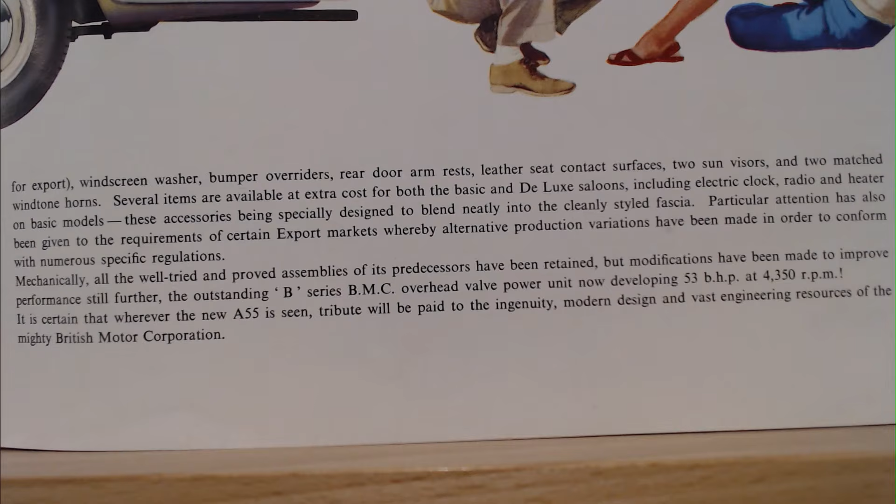Apologies, it is quite small writing, quite hard to see, but let's move to the car now.

So just zooming in on the front end there. Front end I always really liked. I always loved this sort of chrome around the headlights and these big overriders on there. Overriders, so it must mean that this is the deluxe example.

Moving the camera back, we see all that bright work around the windows, which I also really loved as well, and of course quarter lights. Incidentally, my love for quarter lights came from the Morris Oxford actually, which my dad had.

Overall, I really like the styling. I love these huge wings, sorry, not wings, fins on the back there with those interesting lights, and this sort of interesting area here where we'll certainly see later on you can have an option for a two-tone, and that kind of incorporated that little design.

But we can see this is a single colour car in this example, and then here is the family doing some kind of hiking type pursuit, although the children's footwear don't look suitable for that, and certainly the mother's doesn't.

Anyway, let's turn the page. So like I said, this does open into like a brochure style, so if I open this up...

So yes, at the top here, the colours, or some of the colours, we can see going around the edge, and then we've got a little bit of text in the middle, and then the list of colours. Let's look at this first, and then we'll come around these different colours here.

So it starts by saying colour and beauty from every point of view, and then this small writing tells us to choose from the magnificent range of exterior and interior trim colours.

You can be sure of the hard wearing qualities of the gloss enamel finish on the Cambridge saloon. For every body shell undergoes 31 preparatory processes, including rust preventing, degreasing, etc., before the first coat of true colour is applied.

At slight extra cost, dual tone paint exteriors are available, together with interiors in vinyl treated fabric and leather or Duracore. These, together with the standard range of single colour finishes, are set out below. So let's have a look at the table.

Going to the box gives you an idea of the colours you could choose: starting with the single tone colours of Farina Grey, Grampian Grey, Sutherland Green, Ocean Blue, Orchid or Black, and then the dual tone colours of Farina Grey and Horizon Blue, Farina Grey and Tartan Red, Farina Grey and Black, Farina Grey and Orchid, Orchid and Black. Then it starts talking about the different seats, whether you get leather, vinyl or treated fabric, etc. But the images are interesting and really show you a lot better.

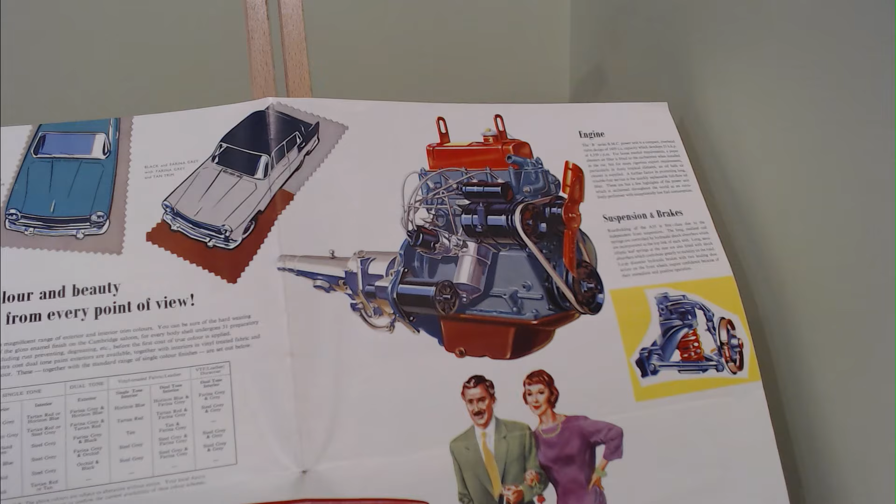Anyway, let's move back a little bit, because on the top right hand corner it starts talking about some of the mechanicals, and we certainly can't miss that. Let's go to the text for the engine first.

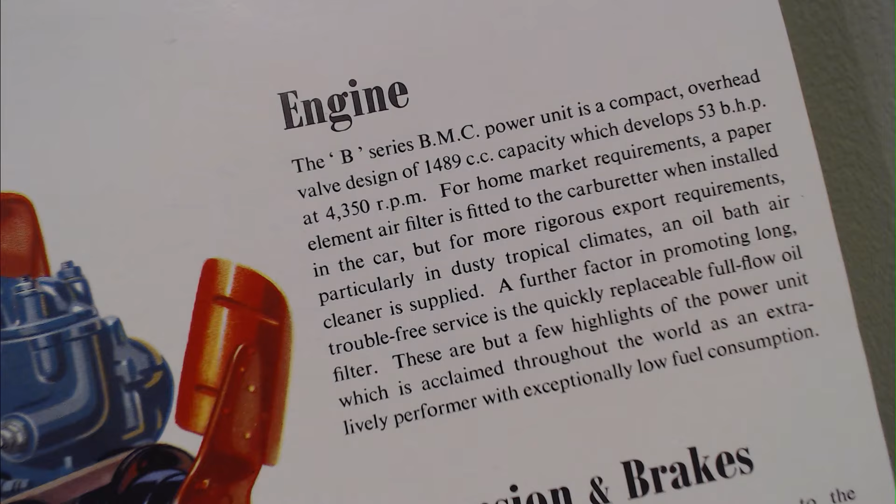Right at the top here it's telling us the B series BMC power unit is a compact overhead valve design of 1489cc capacity, which develops 53 bhp at 4,350 rpm. For home market requirements, a paper element air filter is fitted to the carburetor when installed in the car. But for more rigorous export requirements, particularly in dusty tropical climates, an oil bath air cleaner is supplied. A further factor in promoting long, trouble-free service is the quickly replaceable full flow oil filter. These are but a few highlights of the power unit, which is acclaimed throughout the world as an extra lively performer with exceptional low fuel consumption.

And then we got a really beautifully drawn image of the engine. That's quite talented to draw that particular engine, and certainly a shout out to the artists of the time who are never named.

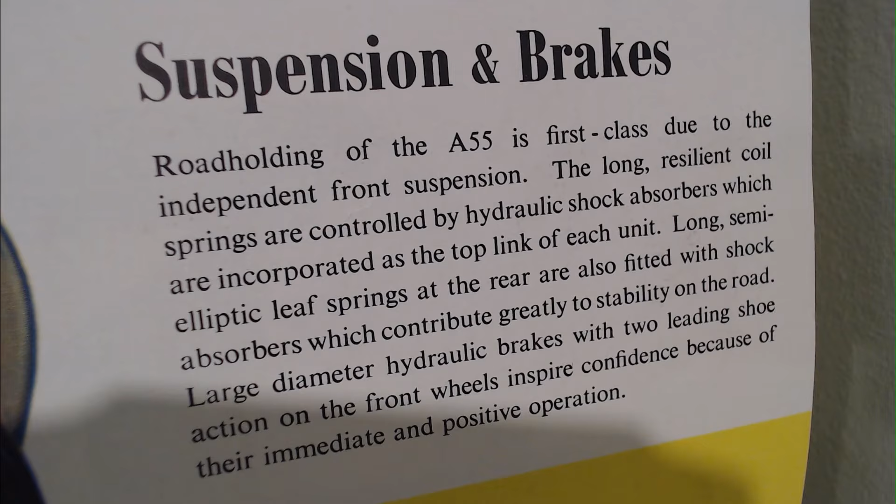Suspension and brakes: road holding of the A55 is first class due to the independent front suspension. The long, resilient coil springs are controlled by hydraulic shock absorbers, which are incorporated as the top link of each unit. Long semi-elliptic leaf springs at the rear are also fitted with shock absorbers, which contribute greatly to stability on the road. Large diameter hydraulic brakes with 2 leading shoe action on the front wheels inspire confidence because of their immediate and positive operation. And then to go with it, another really beautifully drawn image, this time of the suspension and brakes.

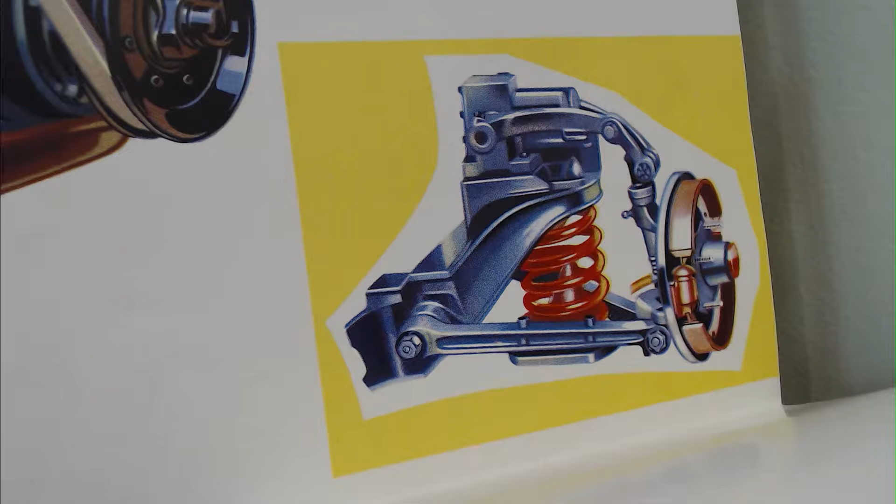Working our way down to the bottom of the brochure now, it starts talking about some of the key features: door handle, ashtray, pendant pedals and fascia. So let's work our way around here. Firstly, door handle: push button handles are fitted to all doors, and an additional safety catch in the lock mechanism ensures that little fingers are well out of mischief.

Once set in the safety position, the door locks can only be operated by the outside handle.

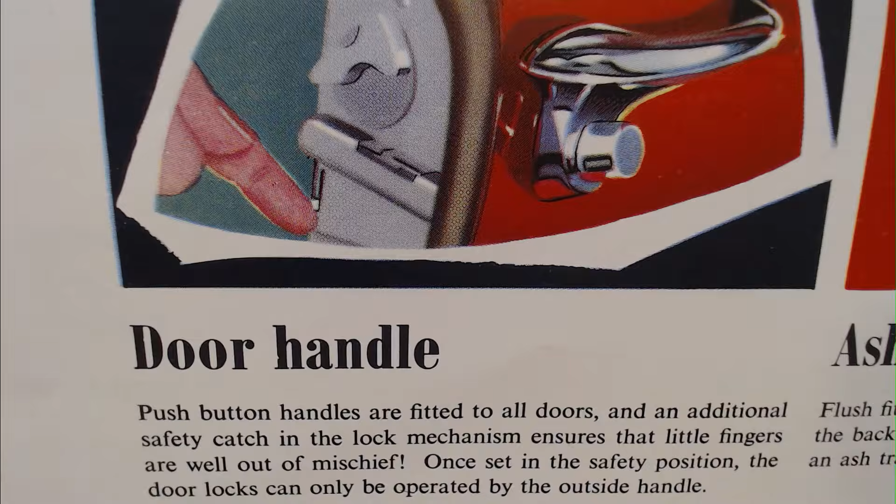Ashtray: flush fitting ashtrays are provided for rear passengers in the back of each front seat squab. For front seat occupants, an ashtray is included in the centre of the fascia top.

Pendant pedals for the hydraulic operation of clutch and brakes, together with the accelerator pedal, are conveniently positioned and ensure freedom from drafts.

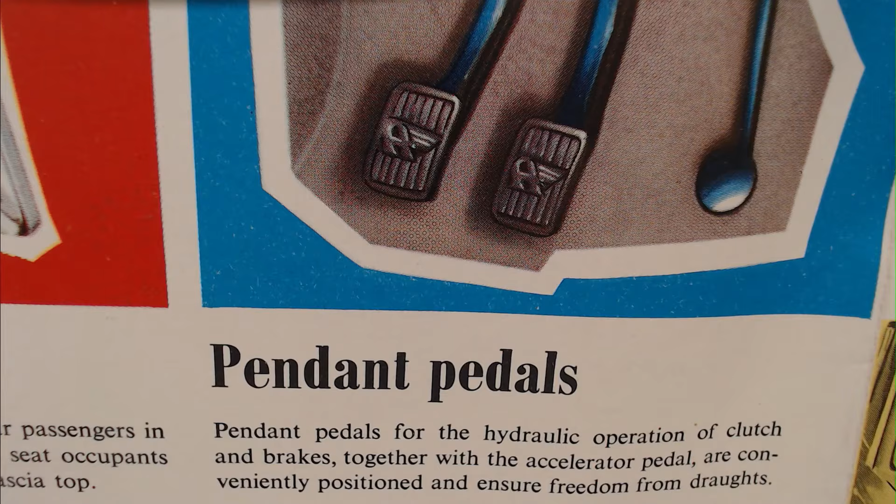Fascia: here again, up to the minute styling has produced an extremely pleasant fascia, carrying the control switches and instruments which tell you all that is needed when driving the Cambridge.

On the passenger side is the enclosed glove box, and beneath is a map or parcel shelf. The top of the fascia is trimmed in black vinyl treated fabric to reduce windscreen reflections, and a foam rubber roll runs along the length of the front edge.

Centre floor or steering column gear change can be fitted as required, providing a choice is made when ordering the car. So we can have column shift or floor shift on these. Let's just move a little bit further.

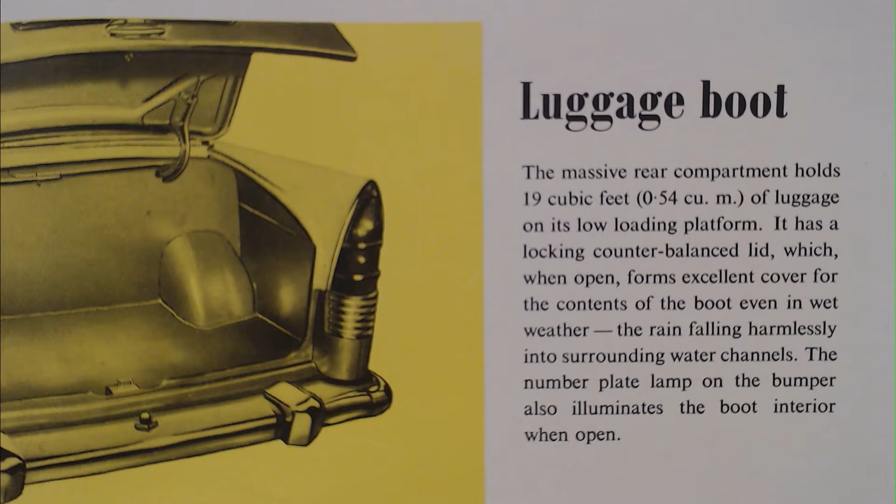The massive rear compartment holds 19 cubic feet of luggage on its low loading platform. It has a locking counterbalance lid which, when open, forms excellent cover for the contents of the boot even in wet weather, the rain falling harmlessly into surrounding water channels. The number plate lamp on the bumper also illuminates the boot interior when open.

Also gives you a little bit of a nice look at those fins.

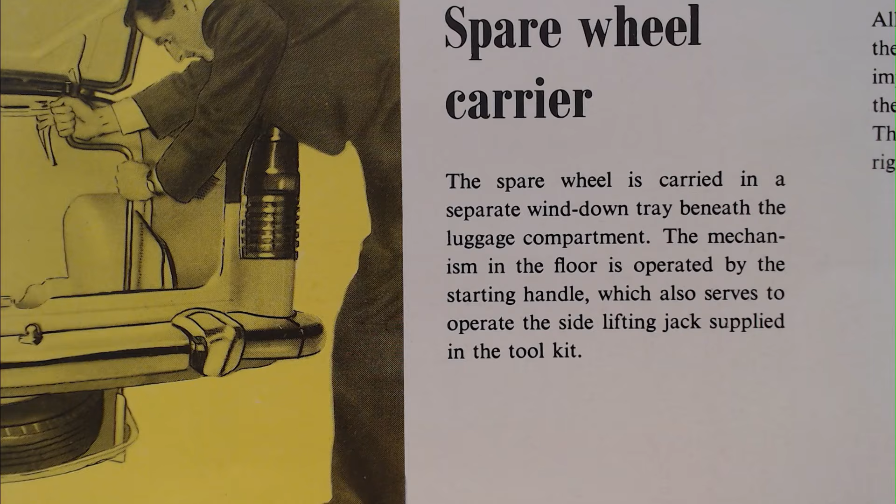Spare wheel carrier: the spare wheel is carried in a separate wind down tray beneath the luggage compartment. The mechanism in the floor is operated by the starting handle, which also serves to operate the side lifting jack supplied in the toolkit, and there it is, winding it down to reveal that spare wheel. Looks like it's in a protective cover, which is nice, so it protects it from some of the elements.

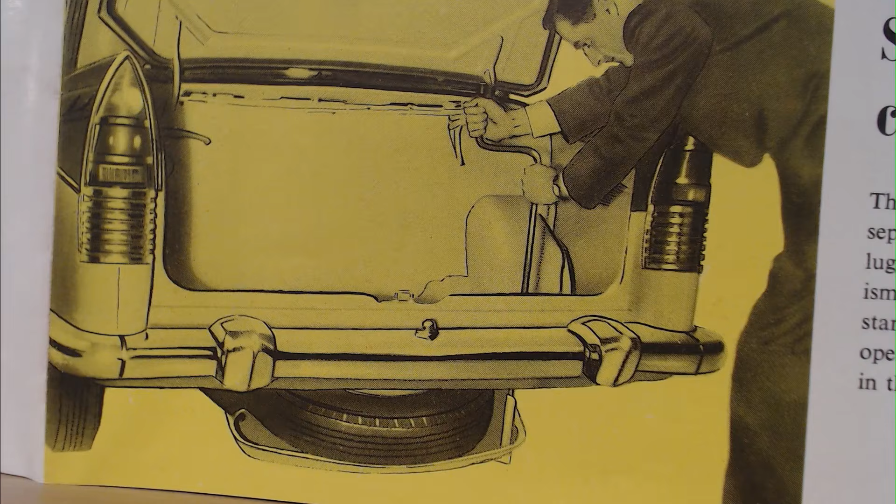And then the wide opening rear door. All doors open wide for free accessibility into the interior, and the locking mechanism of the front door is such that it is impossible to lock oneself out of the car when the key is left in the ignition switch. The combined rear stop lamps and direction indicators are right where they are needed at eye level to following traffic.

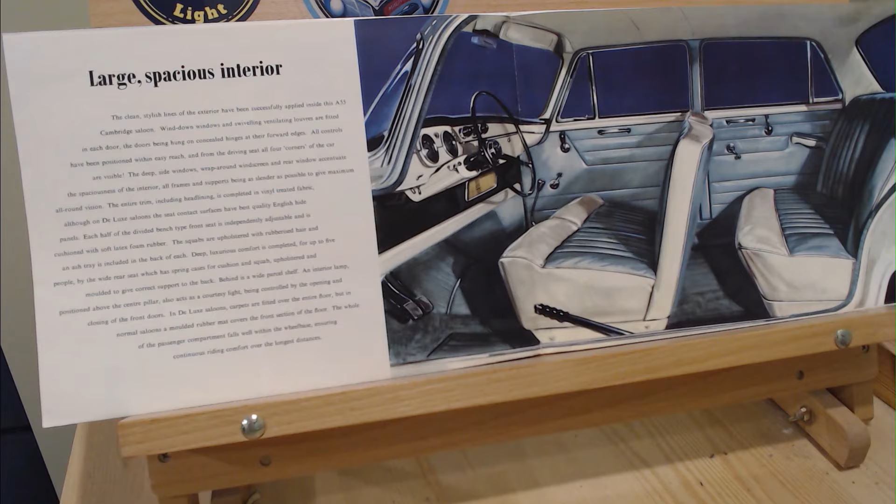And there it is. And we'll look at that nice fin and those lovely door cards. And there we go, we fold the brochure back, and then we get to that interior image, which is a lovely drawn image. Very talented whoever did that. We'll read the text first and we'll have a look at this.

Large, spacious interior, it tells us. The clean, stylish lines of the exterior have been successfully applied inside the A55 Cambridge saloon.

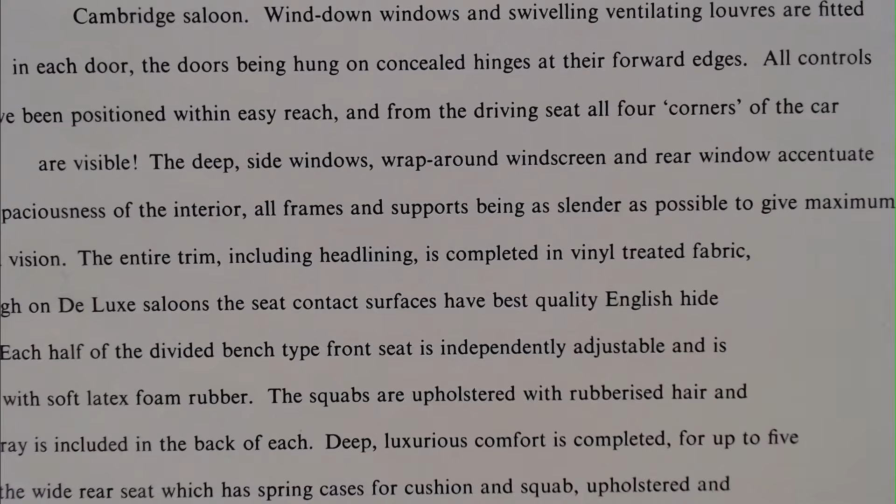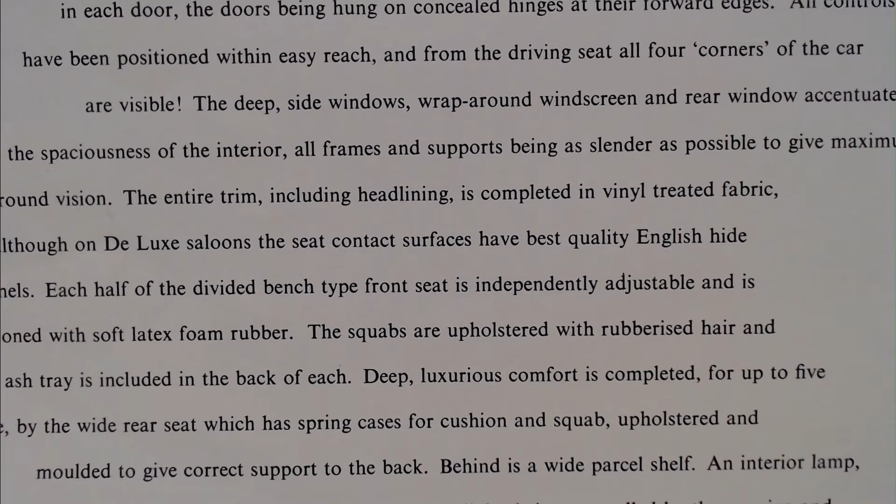Wind down windows and swivelling ventilating louvers are fitted in each door, the doors being hung on concealed hinges at their forward edges. All controls have been positioned within easy reach, and from the driver's seat all four corners of the car are visible. The deep side windows, wraparound windscreen and rear window accentuate the spaciousness of the interior, all frames and supports being as slender as possible to give maximum all-round vision.

The entire trim, including headlining, is completed in vinyl treated fabric, although on the De Luxe saloons the seat contact surfaces have best quality English hide panels. Each half of the divided bench type front seat is independently adjustable and is cushioned with soft latex foam rubber.

The squabs are upholstered with rubberized hair, and an ashtray is included in the back of each. Deep, luxurious comfort is completed for up to 5 people by the wide rear seat, which has spring cases for cushion and squab, upholstered and moulded to give correct support to the back. Behind is a wide parcel shelf.

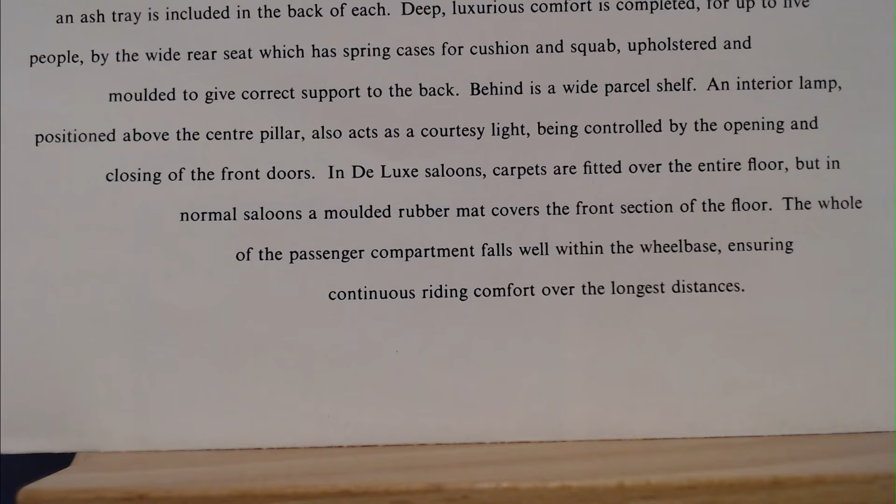An interior lamp positioned above the centre pillar also acts as a courtesy light, controlled by the opening and closing of the front doors. In De Luxe saloons, carpets are fitted over the entire floor, but in normal saloons a moulded rubber mat covers the front section of the floor. The whole of the passenger compartment falls well within the wheelbase, ensuring continuous riding comfort over the longest distance.

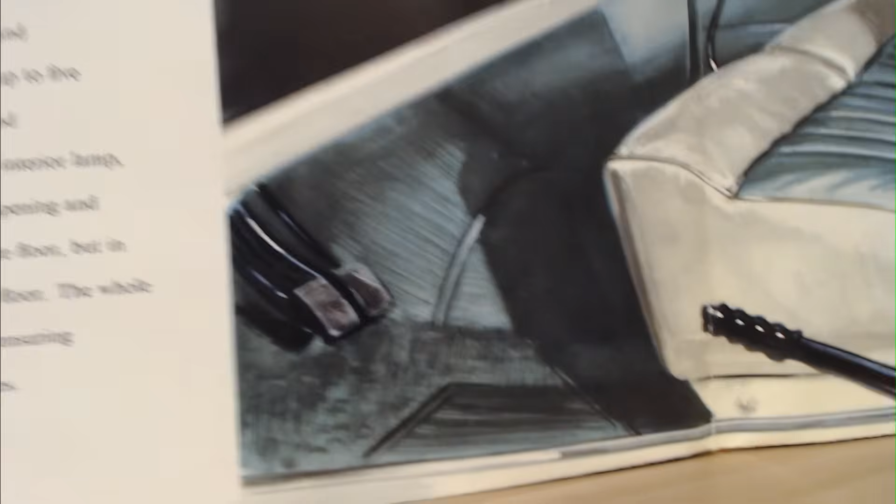And then if we go to the bottom here, looks like this is the drawing of the deluxe example. Of course, looks like more like carpet rather than just a rubberized mat. And then we fold the brochure all the way back again, and that gives us the specifications. As we know, the older the brochure, the more detailed the specifications. So we'll go through this and pick out the key points.

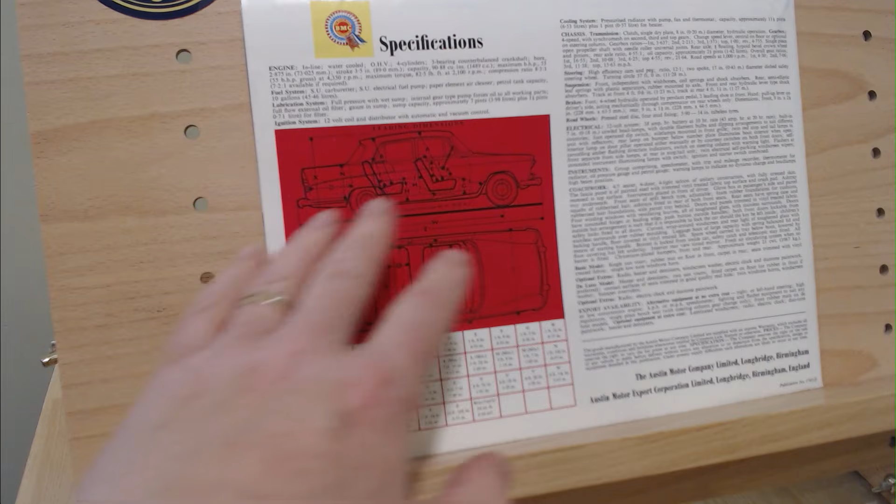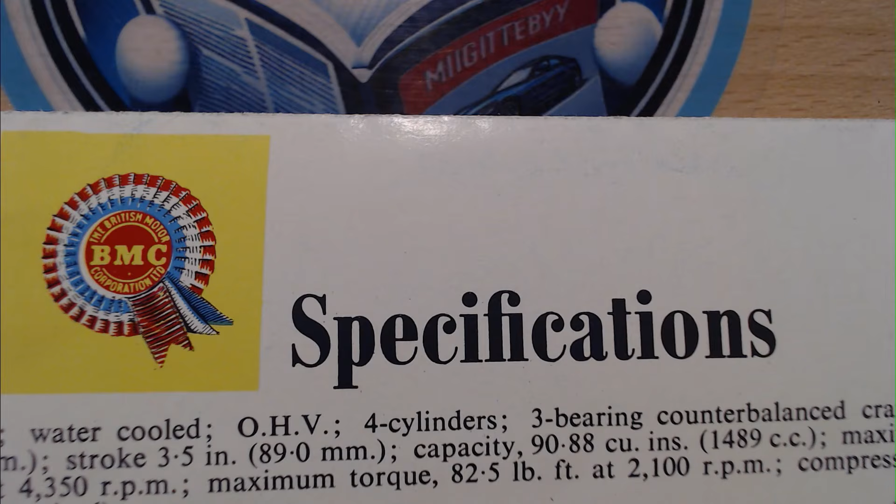This is all the dimensions. I'll probably just cast the camera over those, though it's a bit hard to show all the dimensions on camera. Of course, got to show that lovely little BMC ribbon on there. So tiny little writing again, I've had to zoom in a long way. Unfortunately, zooming in a long way means half of it's missing, but we'll work that out as we go.

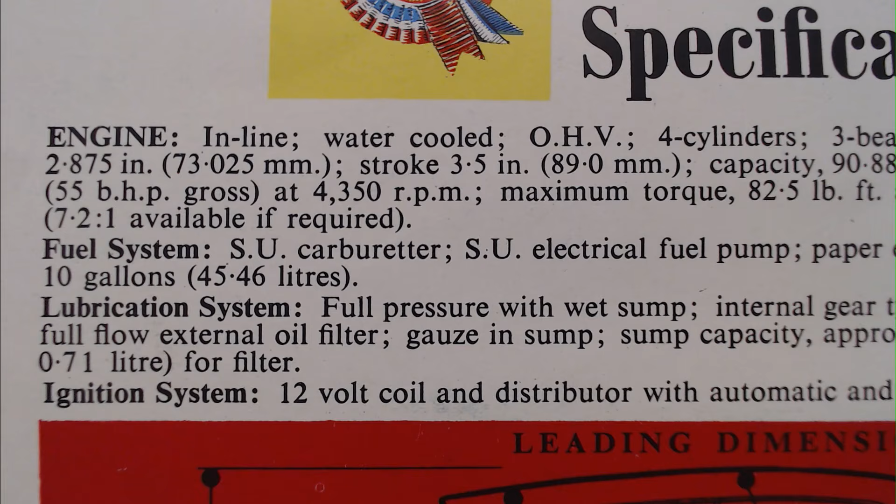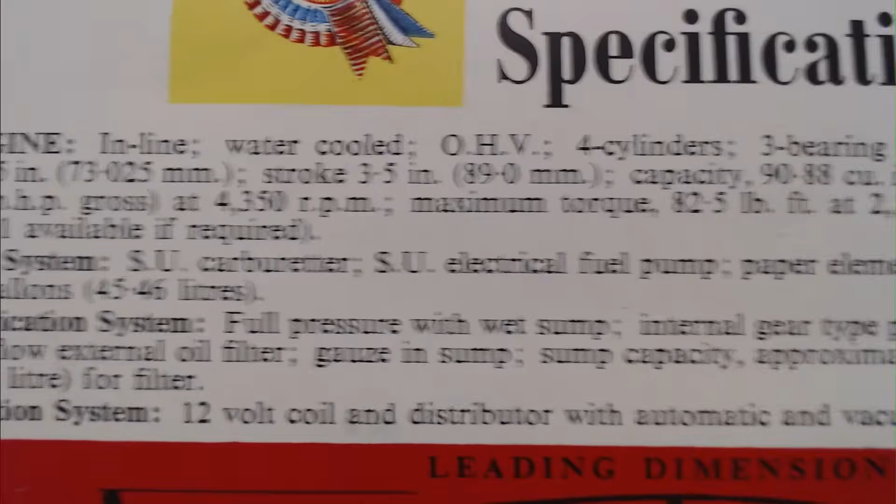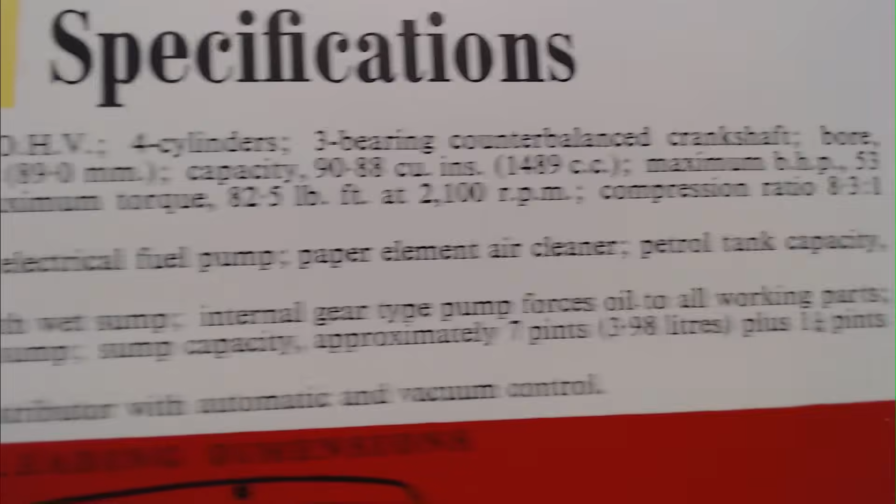Engine: inline water-cooled OHV 4-cylinder, 3-bearing counterbalanced crankshaft, bore, stroke and capacity 1489cc, maximum bhp 53, 55 bhp gross at 4350 rpm. It also shows the maximum torque and compression ratio.

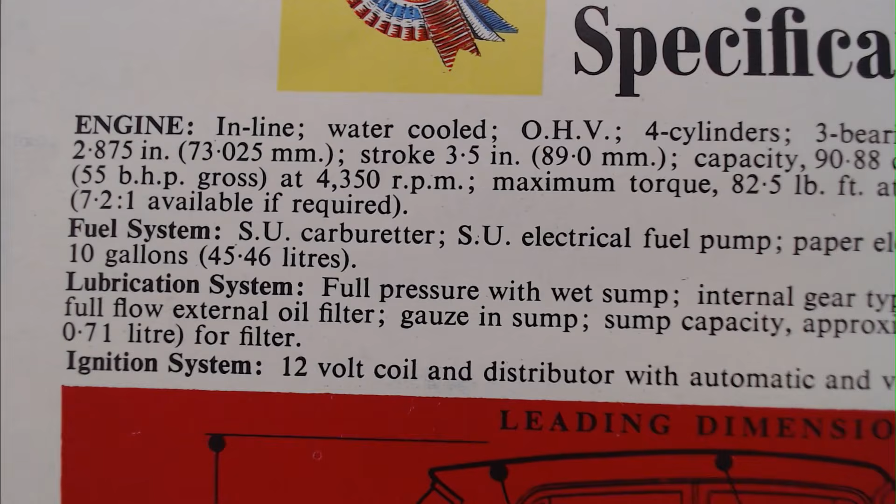Fuel system is SU carburetor, SU electric fuel pump, paper element air cleaner, petrol tank capacity is 10 gallons. Then the lubrication system: full pressure with wet sump, internal gear type pump forces oil to all working parts. Full flow external oil filter gauze in sump capacity approximately 7 pints plus 1¼ pint for the filter.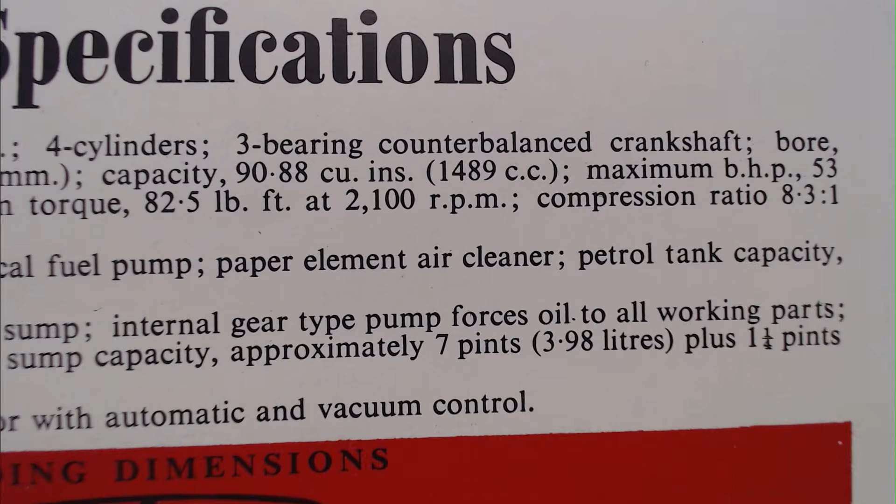Ignition system is 12 volt coil and distributor with automatic and vacuum control. And then of course there are sort of dimension images that they do, but like I say, really too small to show you in great detail on camera. Takes us to the cooling system: pressurized radiator with pump, fan and thermostat, capacity approximately 11½ pints plus 1 pint for the heater.

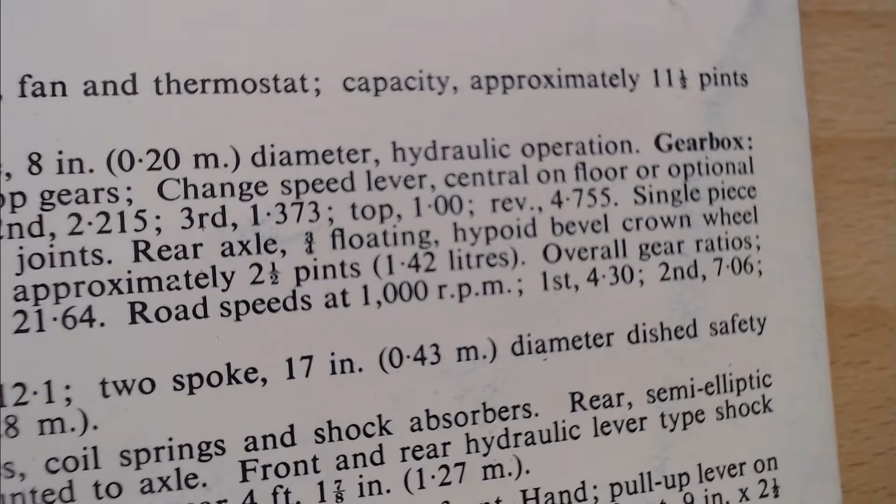Chassis, transmission: clutch single plate 8-inch diameter, hydraulic operation. Gearbox is a 4-speed with synchromesh on second, third and top, so no synchromesh on first. Not unusual for the time though, of course. Change speed lever, central on floor or optional on steering column, and then it goes through all the gear ratios.

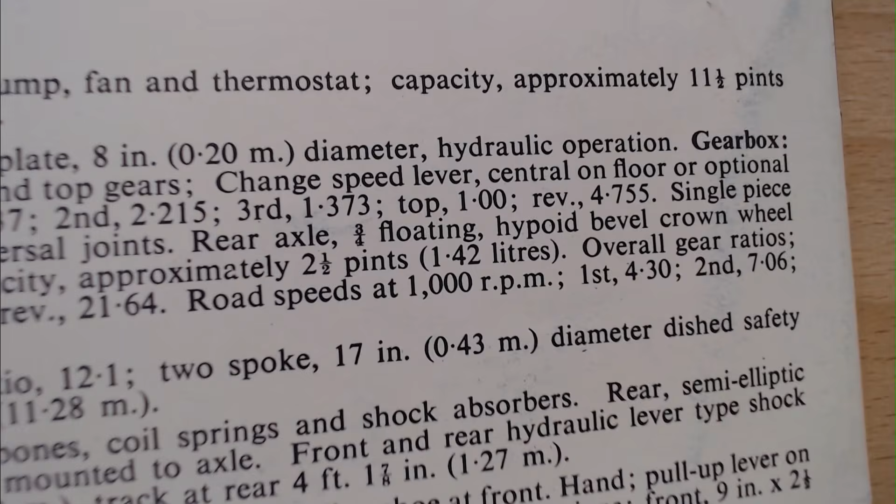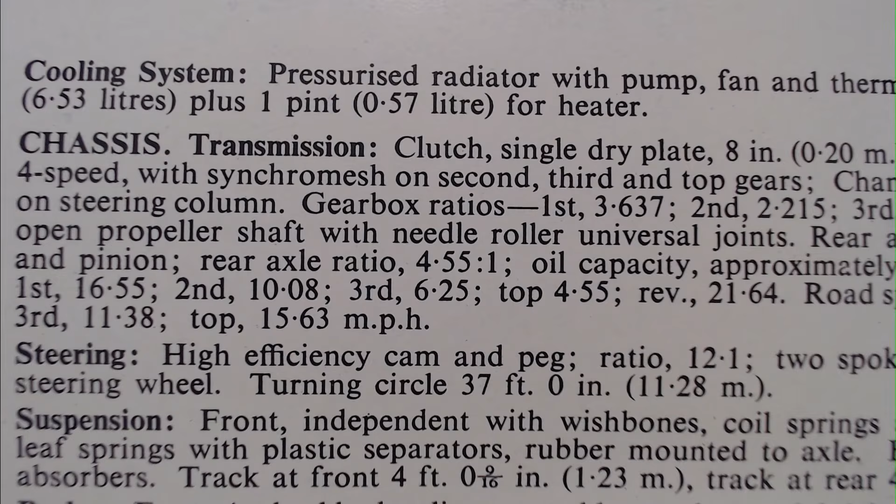And then it tells us single piece open propeller shaft with needle roller universal joints, rear axle with a 3/4 floating hypoid bevel crown wheel and pinion. Tells you about the rear axle ratio, oil capacity approximately 2½ pints, overall gear ratios, and then it tells you those overall gear ratios. But I do apologise for moving the camera around.

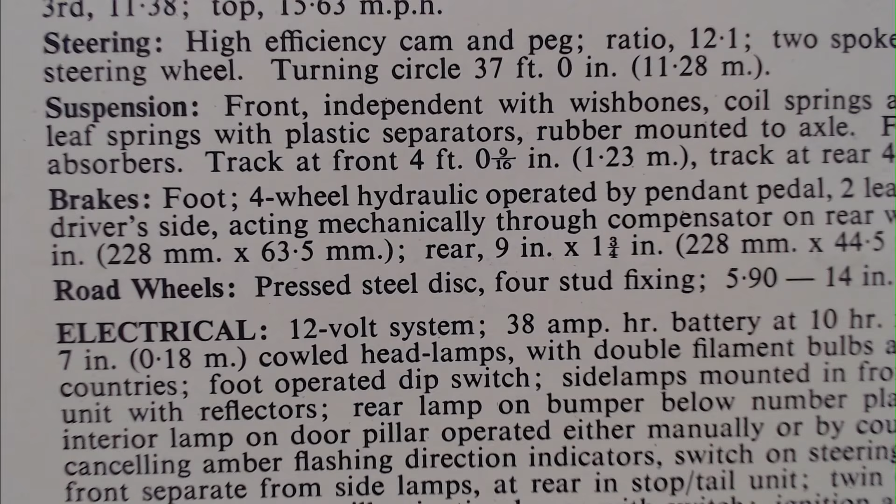Like I say, it's a hard one to really film, this one, and I want to give you as much detail as possible. That then takes us to the steering, which is a high efficiency cam and peg. Tells you the ratio for that. 2-spoke 17-inch diameter dished safety steering wheel. Also tells you the turning circle of 37 feet.

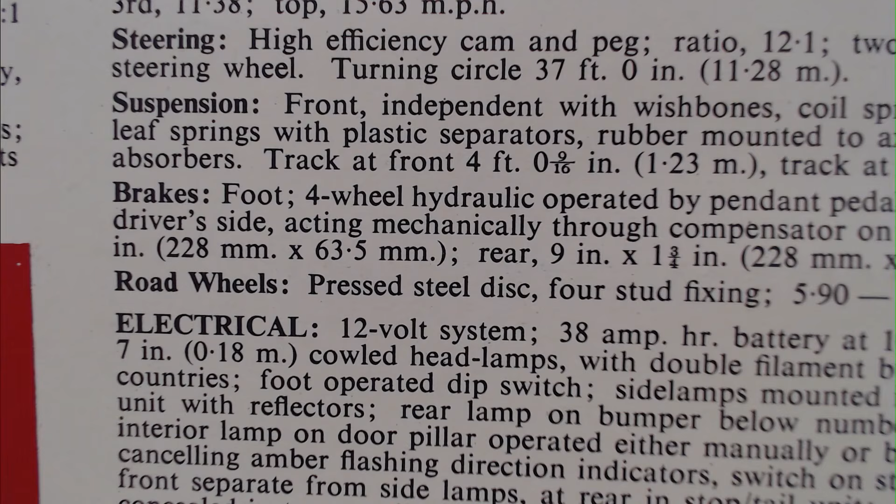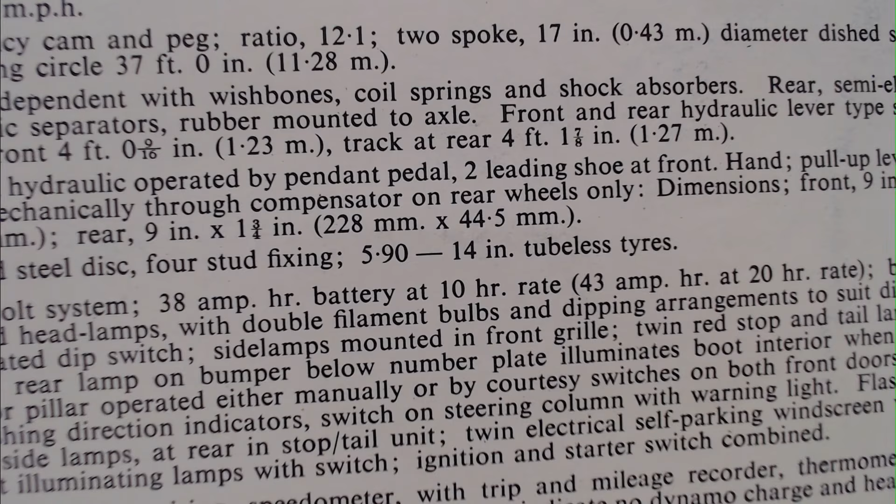Suspension front independent with wishbones, coil springs and shock absorbers. Rear semi-elliptic leaf springs with plastic separators, rubber mounted to axle. Front and rear hydraulic lever type shock absorbers. Track at front just over 4 feet. Track at rear 4 feet 1 and a bit, or 1.27 meters. Funny little details. Really, like I say, the older brochures go into crazy amounts of detail.

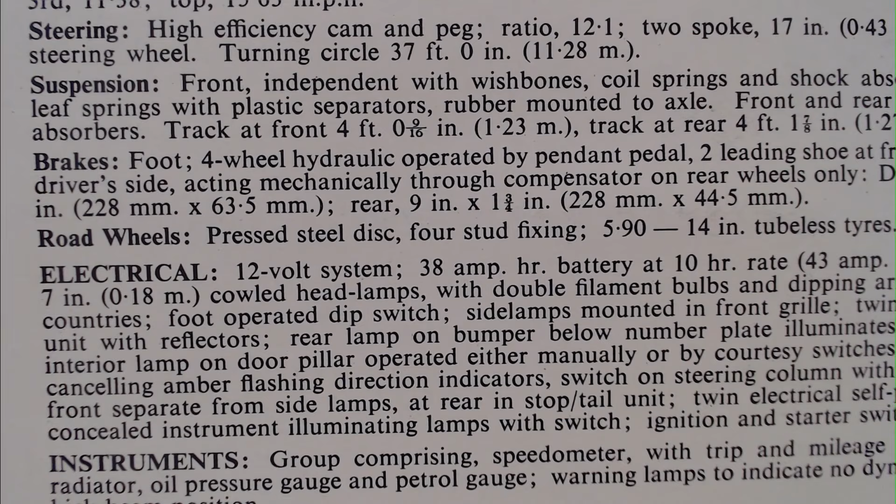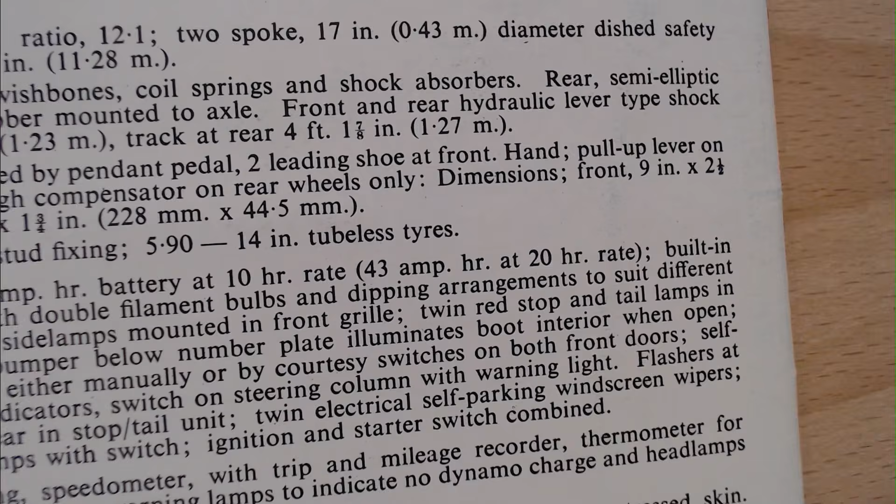Goes on to the brakes. Foot 4-wheel hydraulic operated by pendant pedal. 2 leading shoe at front. Hand pull up lever on driver's side, acting mechanically through compensator on rear wheel only. It shows the dimensions.

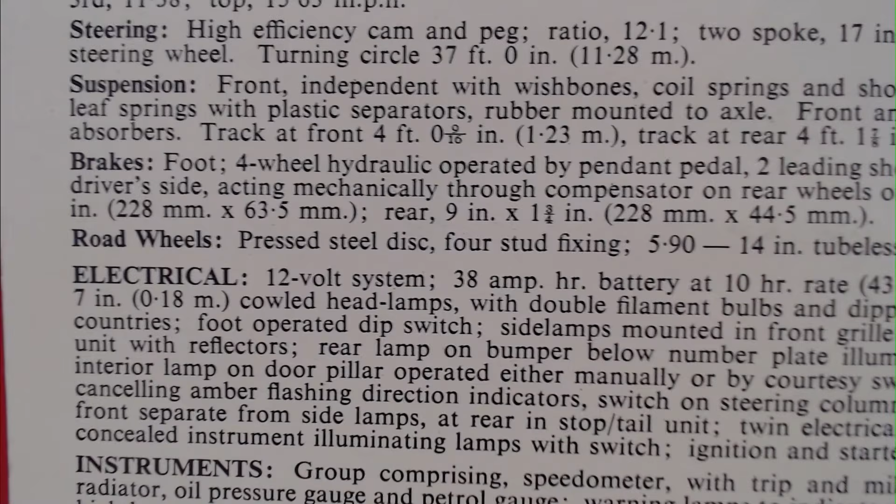Road wheels, pressed steel disc four stud fixing with tubeless tyres.

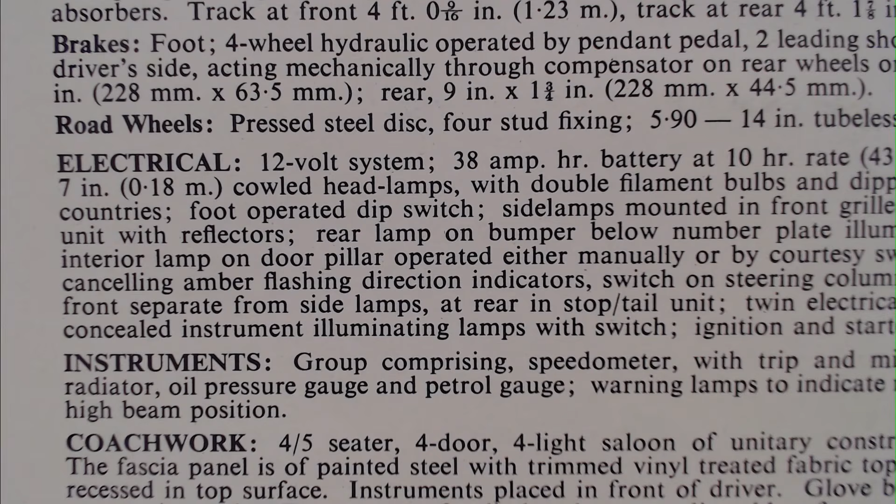Then it moves to the electrical. So it's a 12 volt system, as we learnt. 38 amp hour battery at 10 hour rate, or 43 amp hour at 20 hour rate.

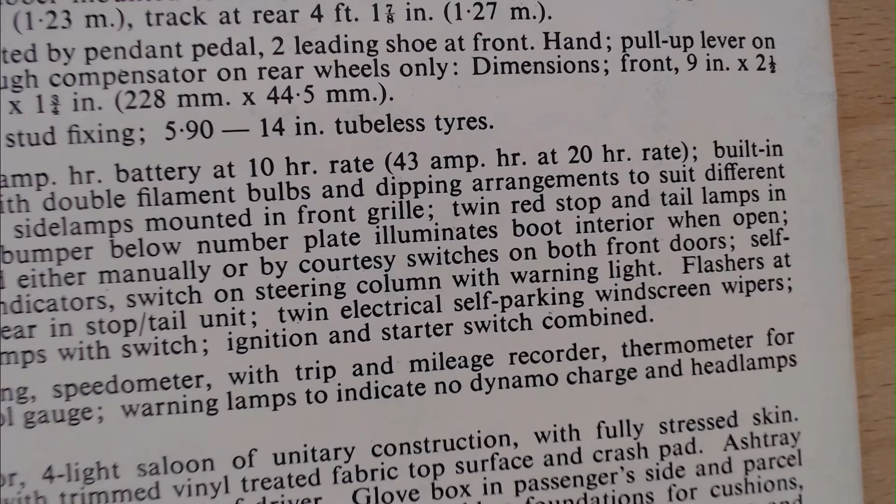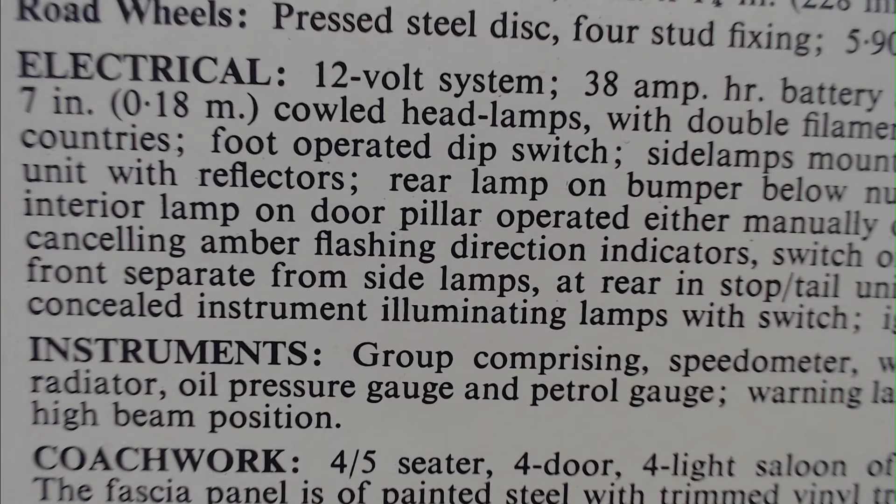Built-in 7-inch cowled headlamps with double filament bulbs and dipping arrangements to suit different countries. Foot operated dip switch, side lamps mounted in front grille, twin red stop and tail lamps in unit with reflectors. Rear lamp on bumper below number plate illuminates boot interior when open.

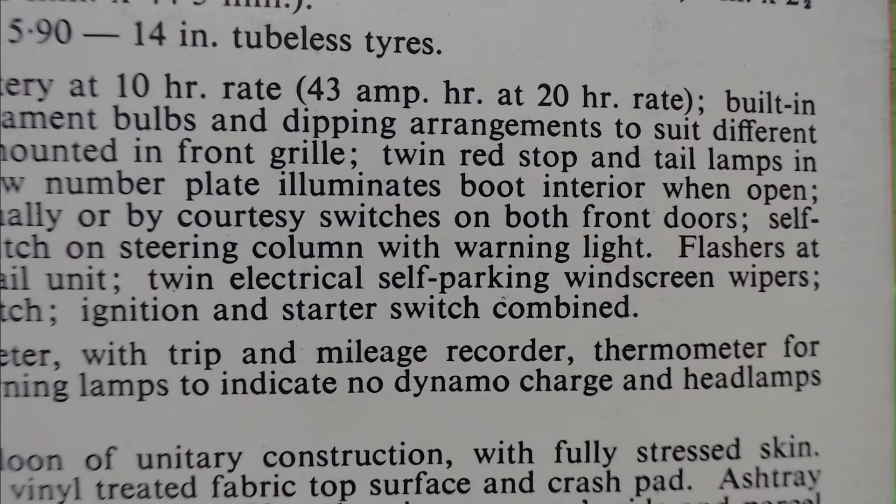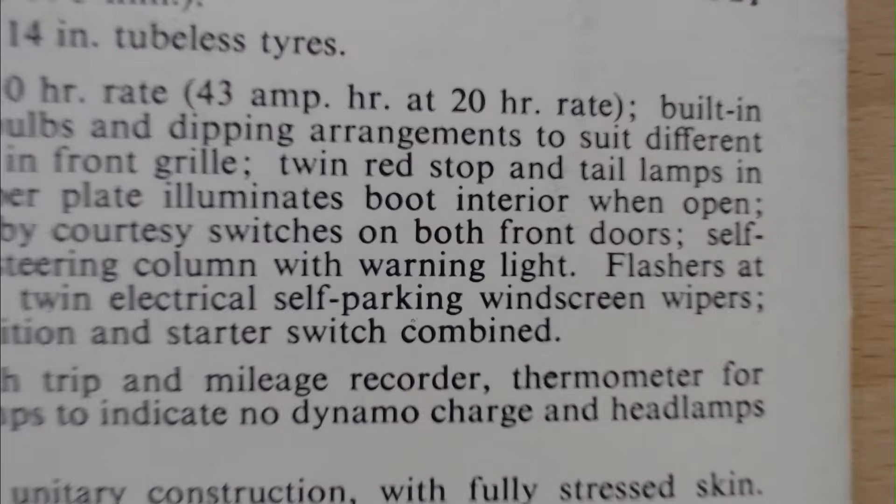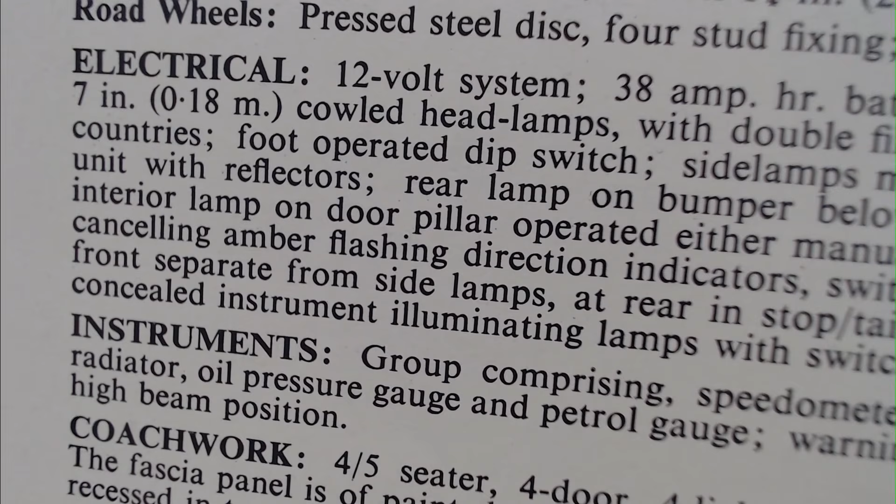Interior lamp on door pillar, operated either manually or by courtesy switches on both front doors. Self-cancelling amber flashing direction indicators switch on steering column with warning lights. Flashers at front separate from side lamps, and at rear in the stop tail unit. Twin electrical self-parking windscreen wipers. Concealed instrument illuminating lamps with switch, ignition and starter switch combined.

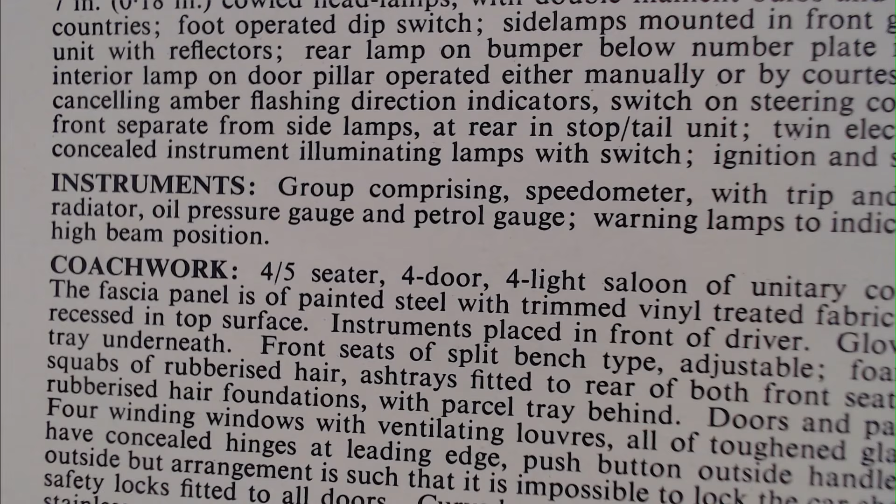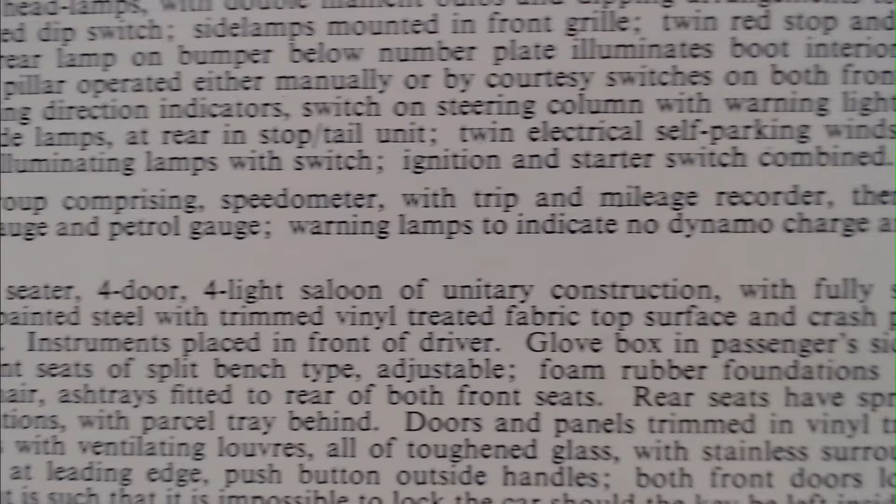So that moves us to the instruments. A group comprising a speedometer with trip and mileage recorder, thermometer for radiator, oil pressure gauge and petrol gauge, warning lamps to indicate no dynamo charge, and headlamps high beam position.

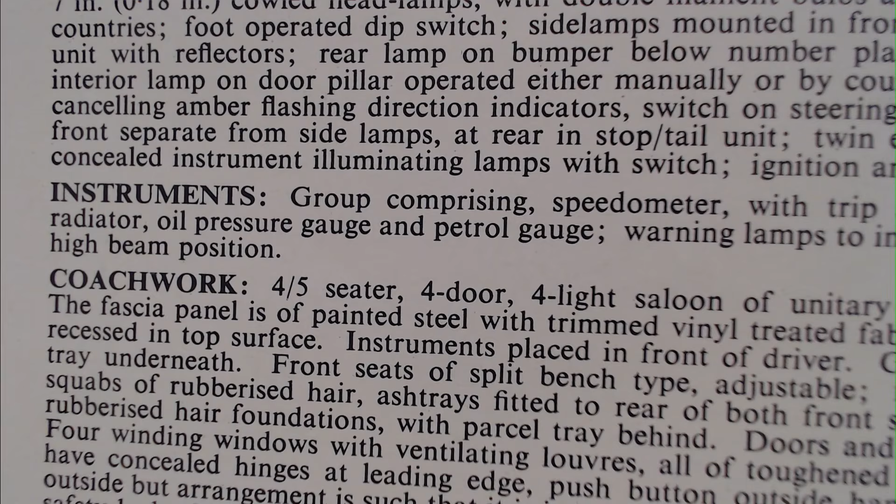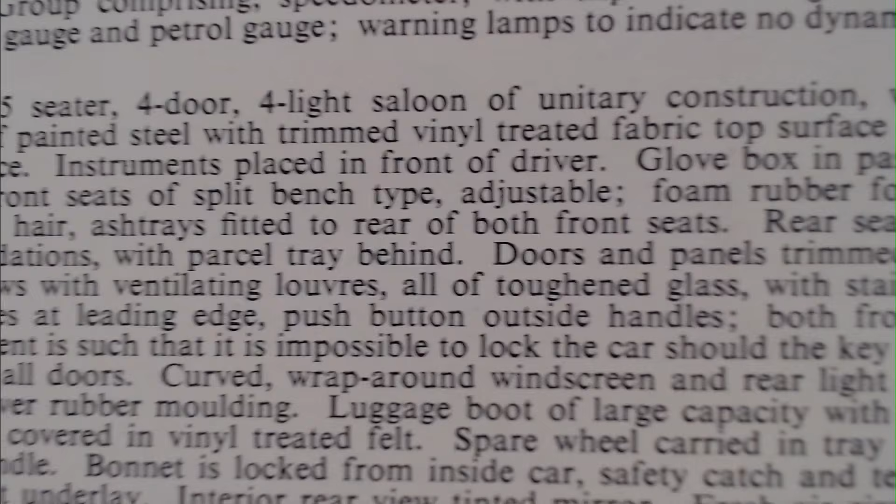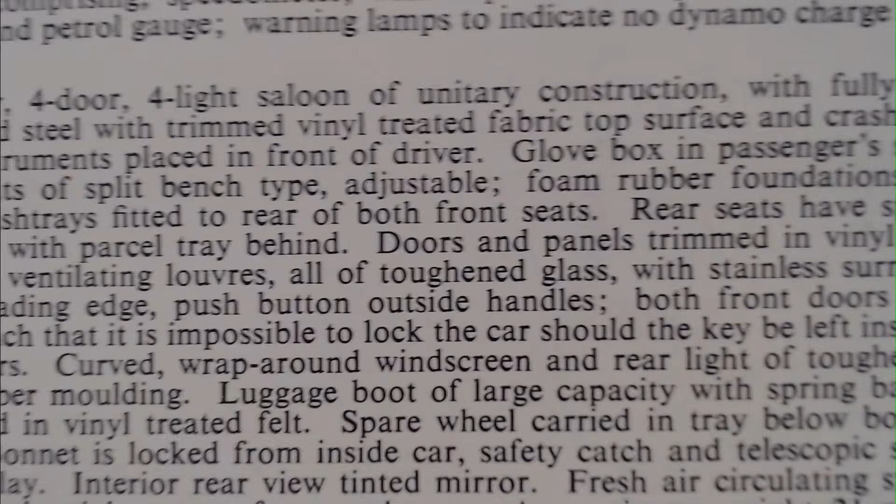And the coachwork: 4 or 5 seater, 4 door, 4 light saloon of unitary construction with fully stressed skin. The fascia panel is of painted steel with trimmed vinyl treated fabric top surface and crash pad. Ashtray recessed in top surface. Instruments placed in front of driver. Glove box on passenger side and parcel tray underneath.

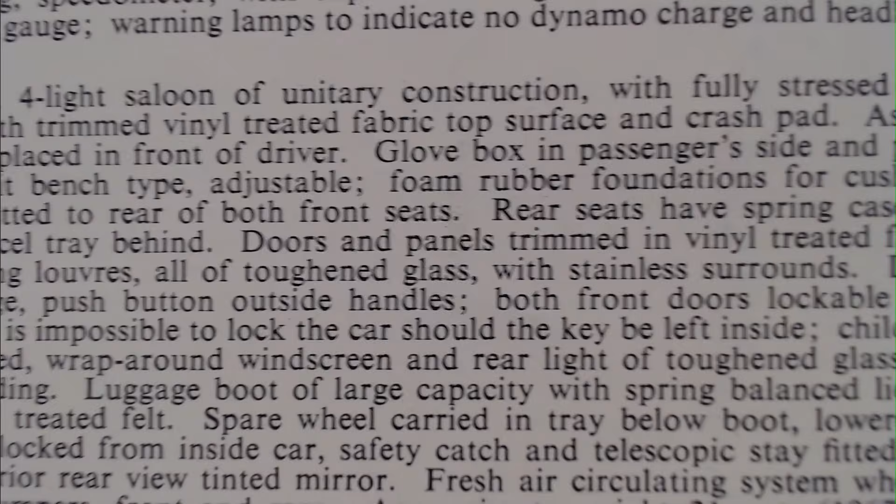Front seats of split bench type, adjustable, foam rubber foundations for cushions, squabs of rubberized hair. Ashtrays fitted to both front seats. Rear seats have spring case, and 4 winding windows with ventilating louvers, all of toughened glass with stainless surrounds.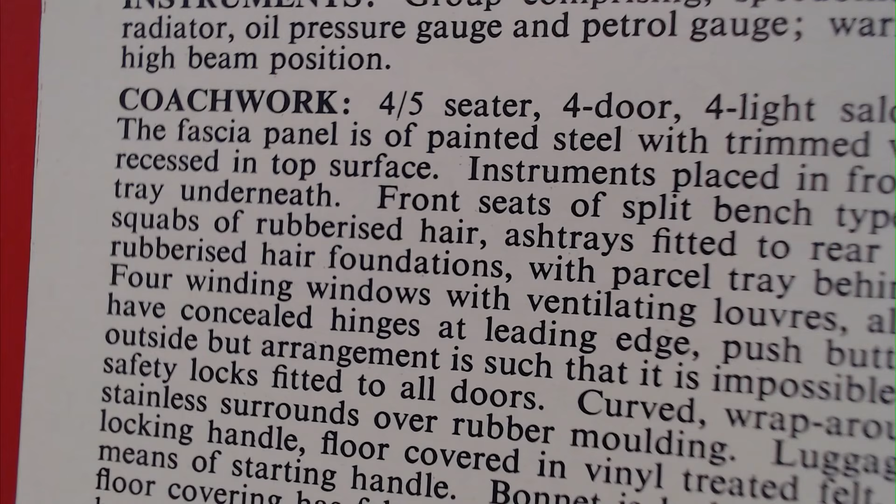Doors have concealed hinges at the leading edge, push button outside handles, both front doors lockable from outside but arranged such that it is impossible to lock the car should the keys be left inside.

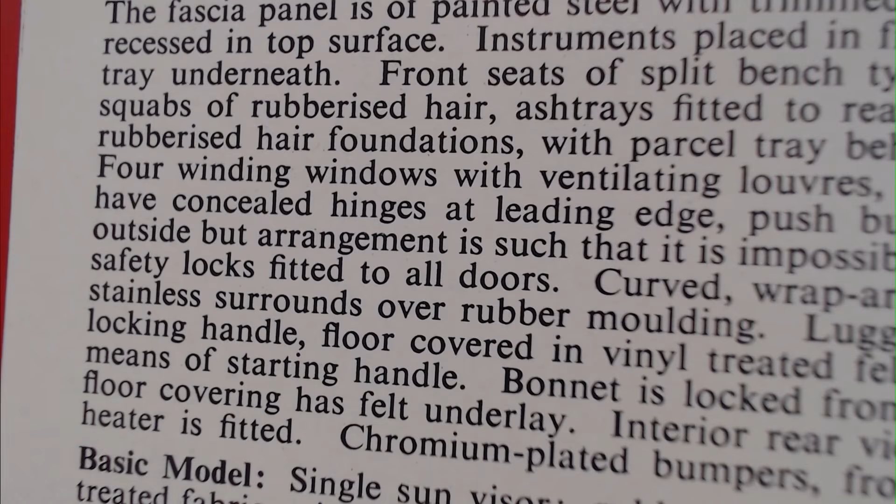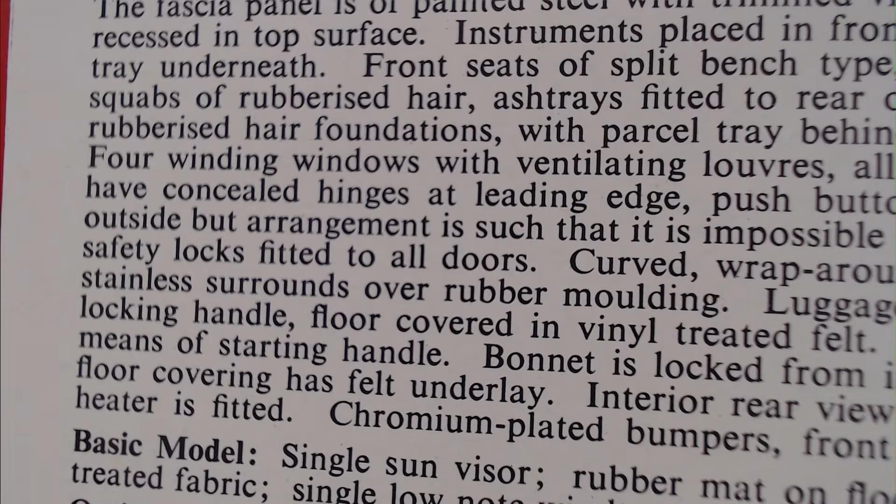Children's safety locks fitted to all doors, curved wraparound windscreen and rear light of toughened glass with stainless surrounds over rubber moulding. Luggage boot of large capacity with spring balanced lid and locking handle.

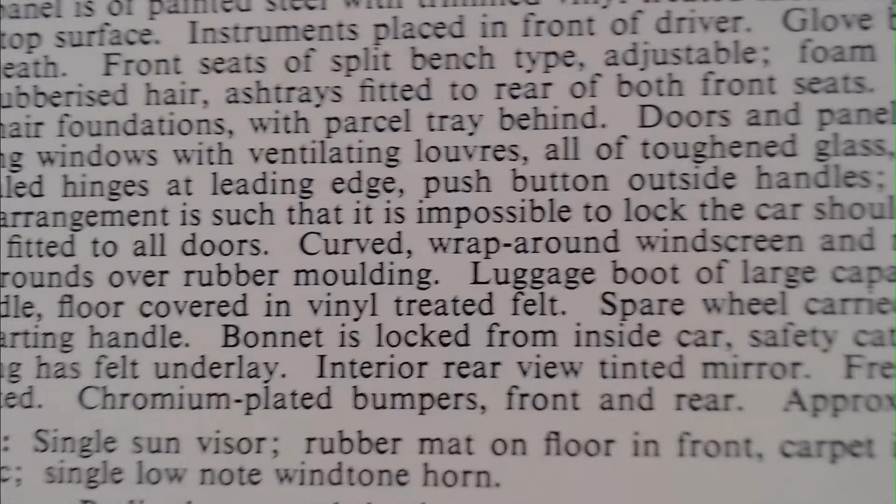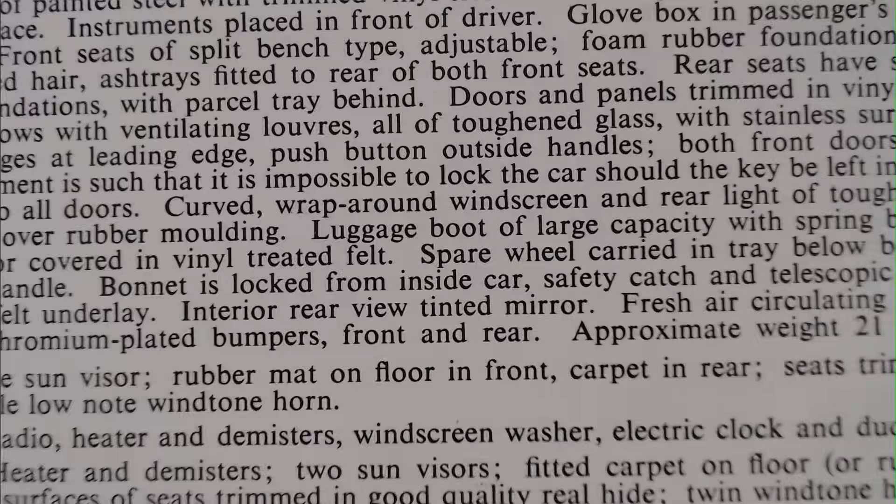Floor covered in vinyl treated felt. Spare wheel carried in tray below boot, lowered by means of starting handle. Bonnet is locked from inside the car. Safety catch and telescopic stay fitted.

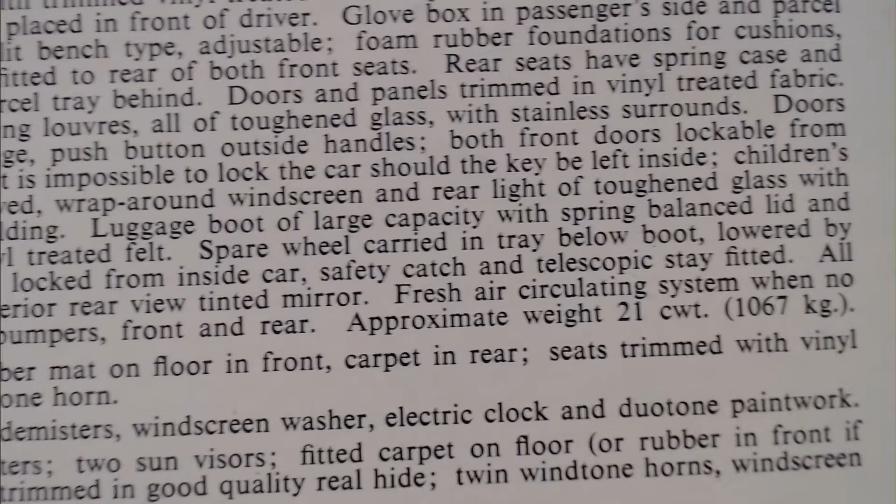All floor covering has felt underlay. Interior rear view tinted mirror. Fresh air circulating system when no heater is fitted. Chromium plated bumpers front and rear. Approximate weight is 21 CWT or 1067 kilograms.

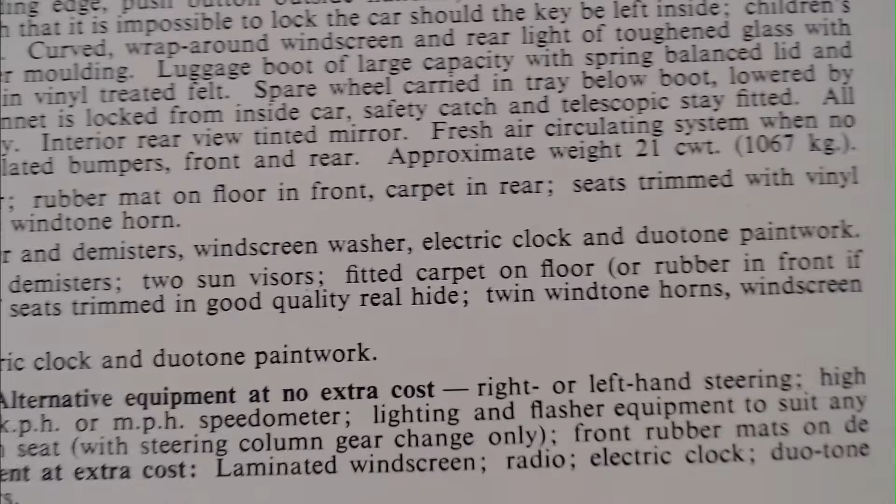It then tells you what the basic model has: single sun visor, rubber mat on floor in front, carpet in rear, seats trimmed with vinyl treated fabric, single low note windtone horn.

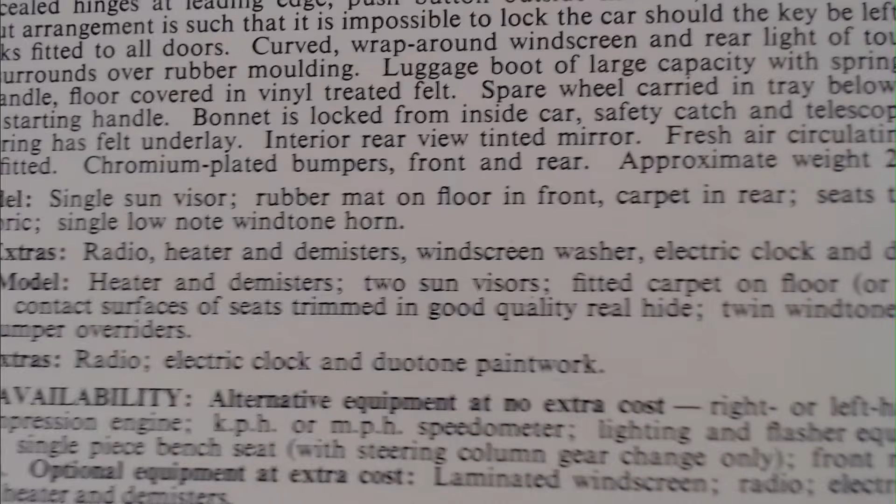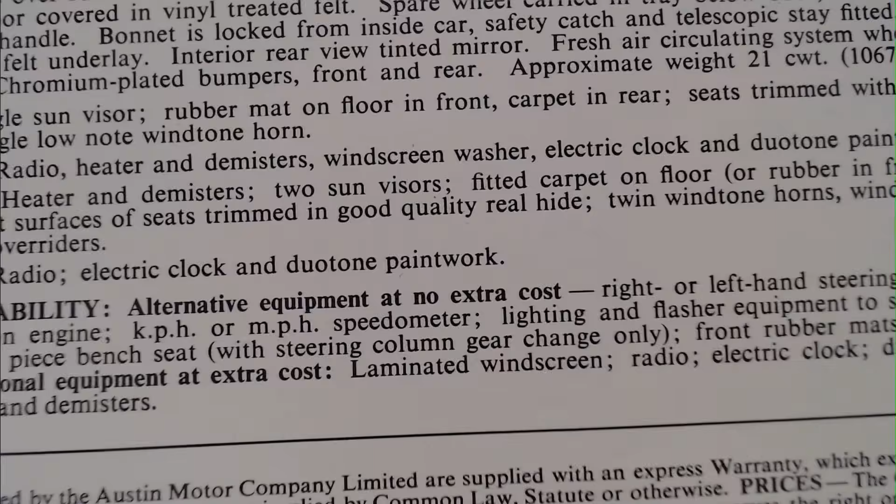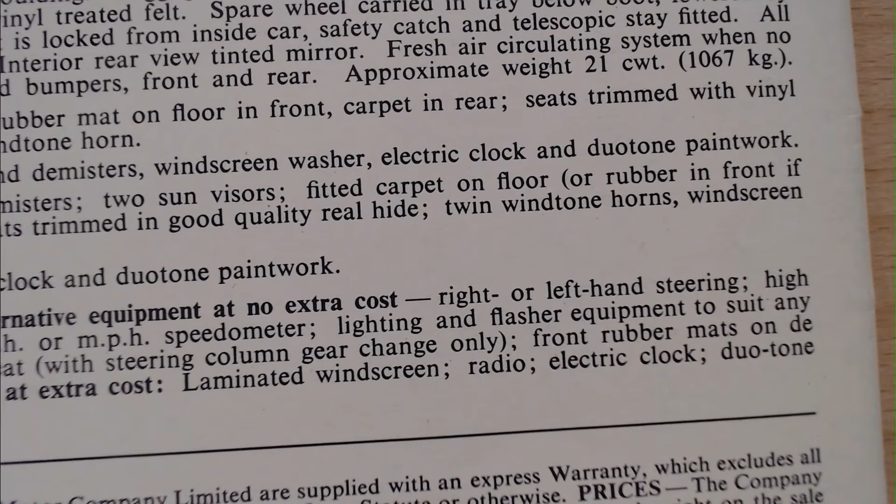Optional extras are a radio, heater and demister, windscreen washers, electric clock and duotone paintwork. However, the deluxe model comes standard with heater and demisters, 2 sun visors, fitted carpet on floor or rubber in front if preferred, contact surfaces of seat trimmed in good quality real hide, twin wind tone horns, windscreen washer and bumper overriders. Optional extras are radio, electric clock and duotone paintwork.

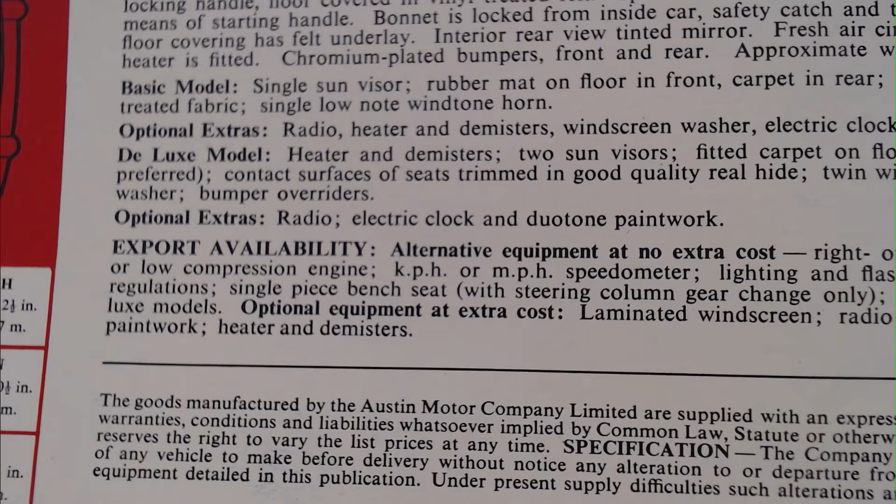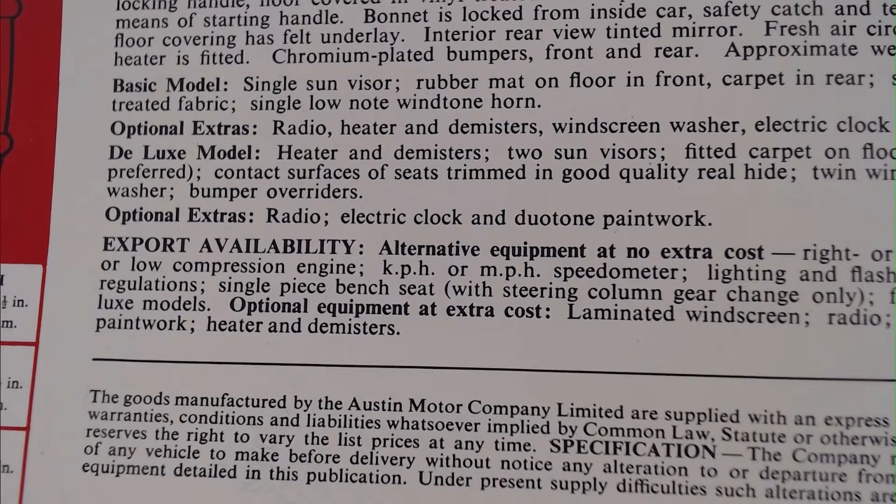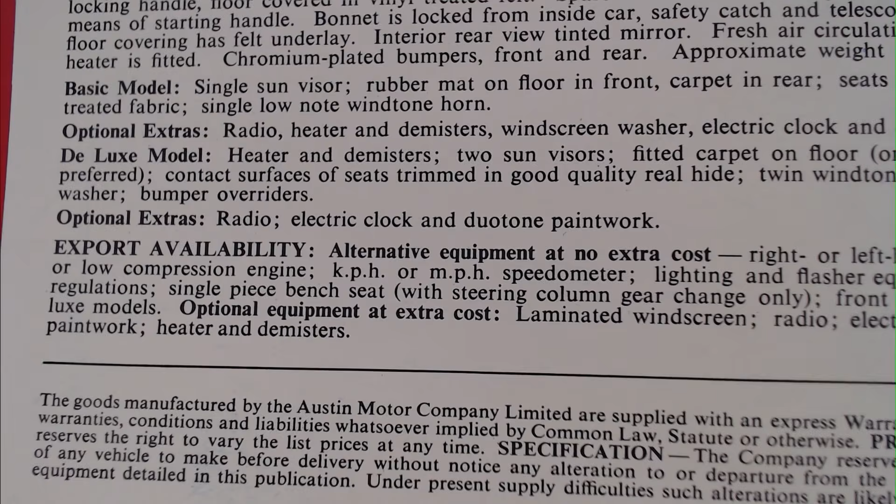Then talks about the export markets: alternative equipment at no extra cost, right or left hand steering, high or low compression engine, kph or mph speedometer, lighting and flasher equipment to suit any regulation, single piece bench seat with steering column gear change only, front rubber mats on deluxe models, and then the optional equipment at extra cost: laminated windscreen, radio, electric clock, duotone paintwork, heater and demister.

Small print of course is the usual thing, we can change things at any time. And at the bottom here: the Austin Motor Company Limited, Longbridge, Birmingham, Austin Motor Export Corporation Limited, Longbridge, Birmingham, England. The publication number is 1745D, and of course printed in England.

So there you go, what a lovely little brochure this is. Really detailed specifications, aren't they?

So therefore time is really moving on, so we should wrap this up pretty quickly, but certainly share your memories of this lovely car, and we'll end with a final look at this lovely front cover, and really a shout out to the artist, some lovely images within there.